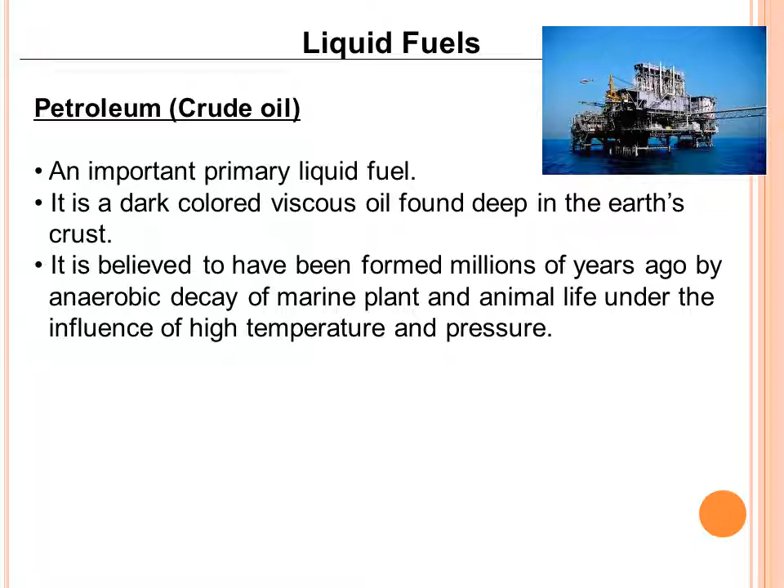So it is a non-renewable source of energy. It is mainly a complex mixture of hydrocarbons, like straight chain paraffins, cycloparaffins, olefins and aromatics. It is a mixture of all these with small amounts of organic compounds containing nitrogen, oxygen, sulfur, and some traces of inorganic compounds.

If we see the elemental analysis of this crude oil, the average percentage of carbon can vary from 83 to 87%, hydrogen 11 to 15%. Because of these two, we get a huge calorific value from this crude oil. Along with carbon and hydrogen, it contains sulfur and oxygen. Sulfur percentage may vary but can be up to 3%. Nitrogen and oxygen can be from 0.1 to 5%.

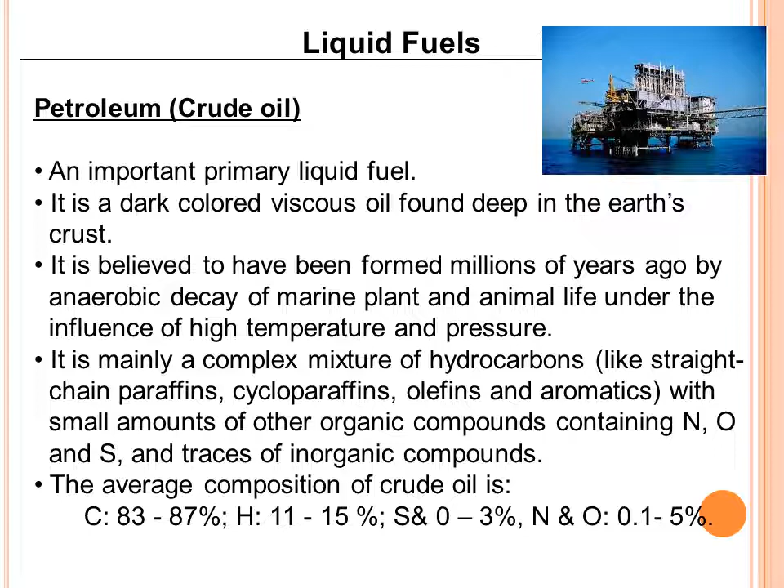Depending on which type of hydrocarbons are present, petroleum is divided into three types. First type is paraffin based, where the major component is paraffin. It contains saturated hydrocarbons from CH4 to C35H72. With that, it may contain a little of naphthalenes and aromatics. From C18H38 onwards, resins and waxes are present.

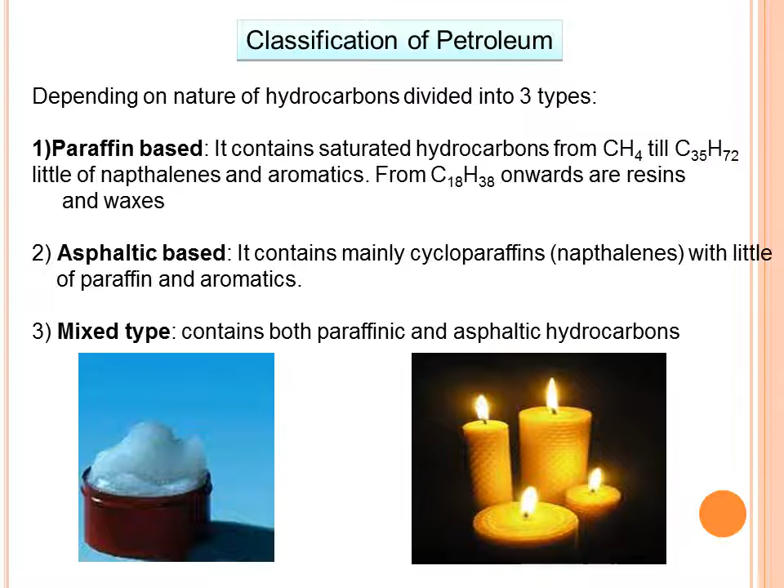Second type is asphaltic based. It contains mainly cycloparaffins, that is naphthalenes, with a little paraffin and aromatic. Third type is mixed, which may contain both paraffin and asphaltic hydrocarbons.

Mining of petroleum: how is it done? Mining of petroleum is done by drilling holes in the earth's crust. Through the holes, pipes are sunk up to oil bearing rocks. Usually, because of the pressure of natural gas, the oil itself comes out. If it will not come out, it is mechanically pumped out using an airlift pump.

Two coaxial pipes are present in the oil bed. Compressed air is forced through the outer pipe, and because of that, oil comes out from the inner pipe. This oil is then conveyed to the refinery through pipelines, where the next process, refining of that petroleum, is done.

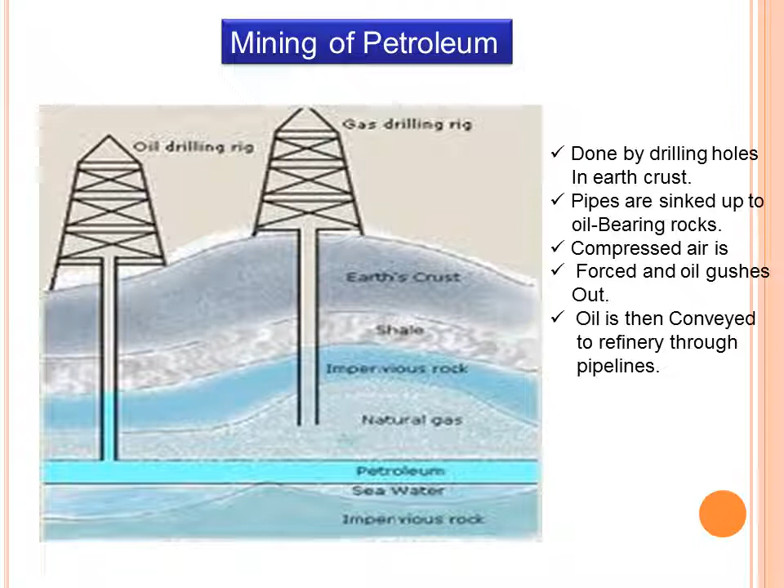After mining of petroleum, the next step is refining of petroleum. Petroleum can't be used as a fuel as it is, since it is a complex mixture of a number of hydrocarbons in the form of solid, liquid or gaseous. So we can't use it directly as a fuel or as a feedstock for chemicals.

So separation of petroleum is done. It is the process of separation of crude oil into different useful fractions on the basis of their boiling points. That is nothing but refining.

Now refining is done in three steps. First is separation of water. Oil with water forms an emulsion, so in the first step we have to remove that water. This emulsion is passed through highly charged electrodes, where the water forms big droplets, and then we can separate it out easily. This process is called Cottrell's process.

Then in the next step, removal of sulfur is done. This oil is treated with copper oxide, forming copper sulfide precipitate, which we can remove by filtration. In the second step we have to remove sulfur, because if we use oil as fuel with sulfur present, it will form harmful gases. So first we have to remove that sulfur. That is the second step.

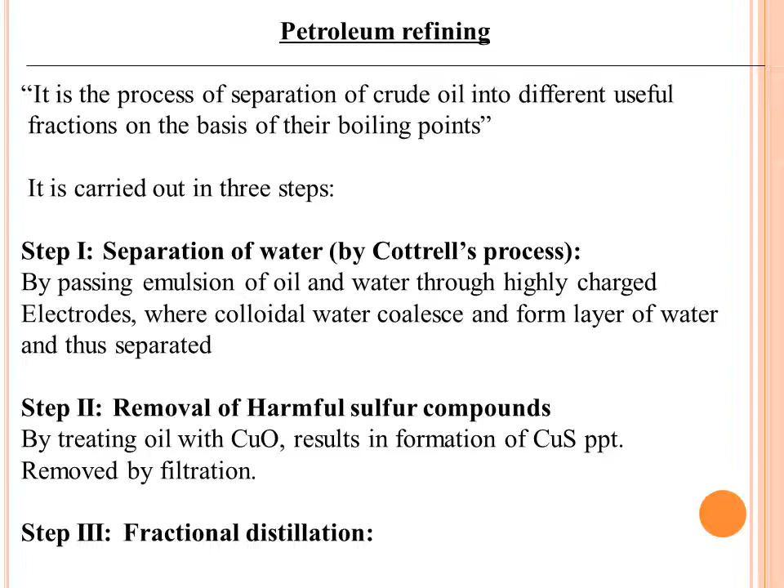The third important step is fractional distillation. What is the principle of fractional distillation? It is that vapors of higher boiling point fractions condense first during stepwise cooling. I will explain this principle, but first we will see the construction of the fractionating tower. It is made of stainless steel, and it is tall and cylindrical.

This tower has a number of small trays made of stainless steel. Each tray or horizontal plate has loosely held bubble cups, through which vapors of the crude oil can pass. Now we will see the process: first the crude oil is heated up to 400 degrees centigrade, and then it is passed through the fractionating tower.

But first, fraction means the constituent. So the first fraction will come out as residue, because its boiling point is more than 400 degrees centigrade. Other than that, all is in the form of vapors, which will pass through the loosely held bubble cups, traveling from bottom to top. So the principle is that the vapors of higher boiling point condense first, and that first fraction comes out.

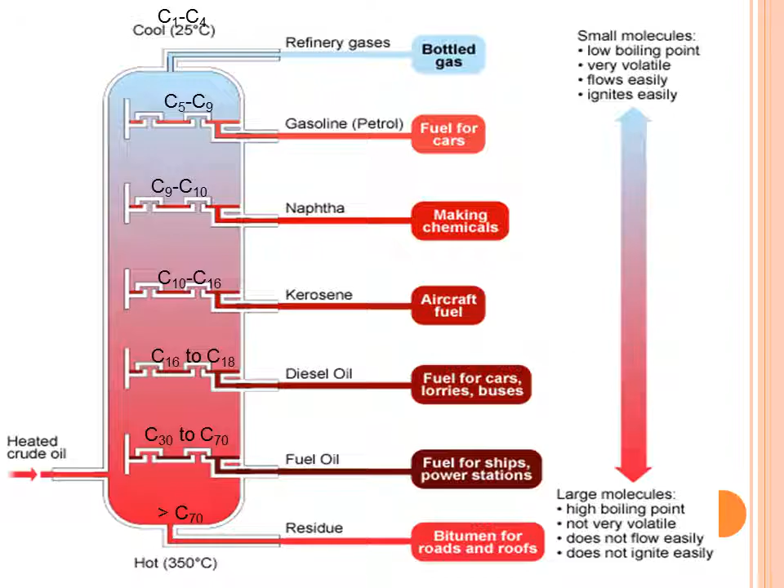So this is fractional distillation. Again, what is the principle? The fraction or constituent having higher boiling point will condense first and come out first. Other fractions will travel through the bubble cups, with step by step cooling, and we collect the constituents step by step. So here again the principle is given: the vapors of higher boiling point fractions condense first during the stepwise cooling.

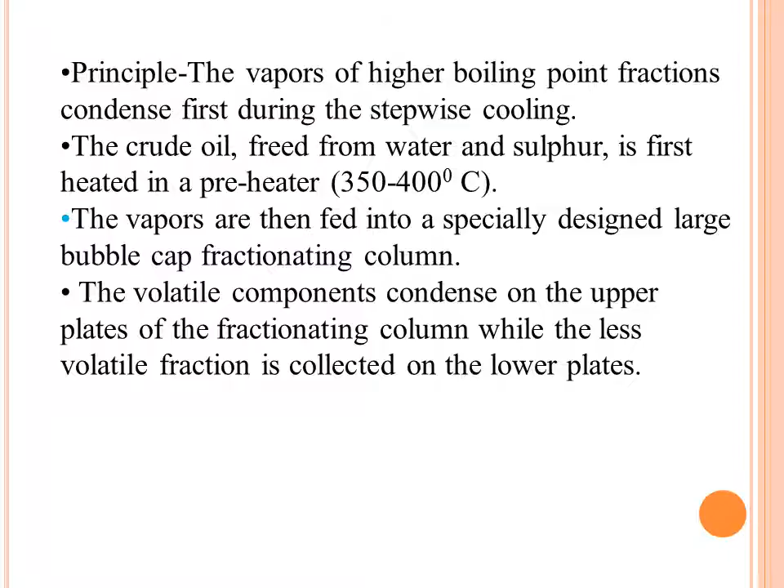The crude oil, freed from water and sulfur, is first heated in a preheater to a temperature up to 400 degrees centigrade. The vapors are then fed into a specially designed large bubble cap fractionating column. The volatile components condense on the upper plates of the fractionating column, while the less volatile fraction is collected on the lower plates. Then there is a table given here with the name of fraction, boiling range, approximate composition, and uses.

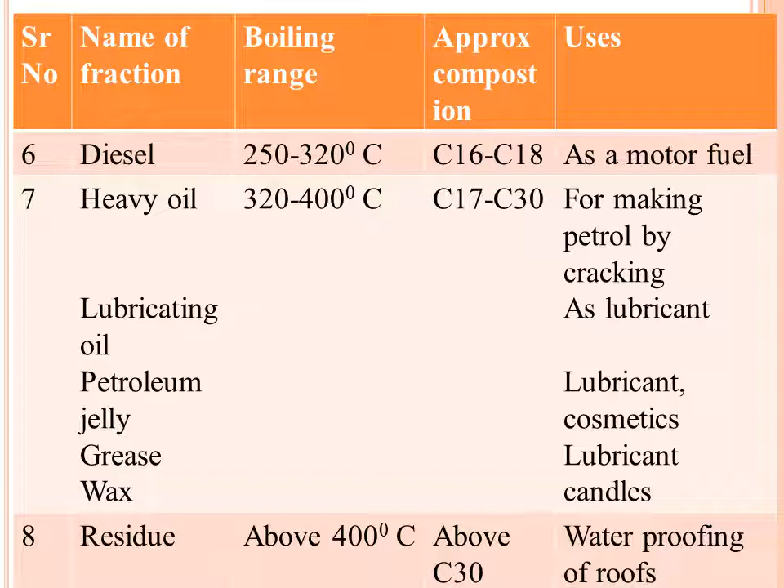Now next we have to see some gaseous fuels. Why are gaseous fuels important? These gaseous fuels have very high calorific value, and they burn clean without smoke or ash. As there is no inorganic matter, there is no formation of ash, and it burns clean without formation of smoke or any harmful gas. Combustion is controllable and this control is very easy. Highly flammable is the only problem, so special care has to be taken.

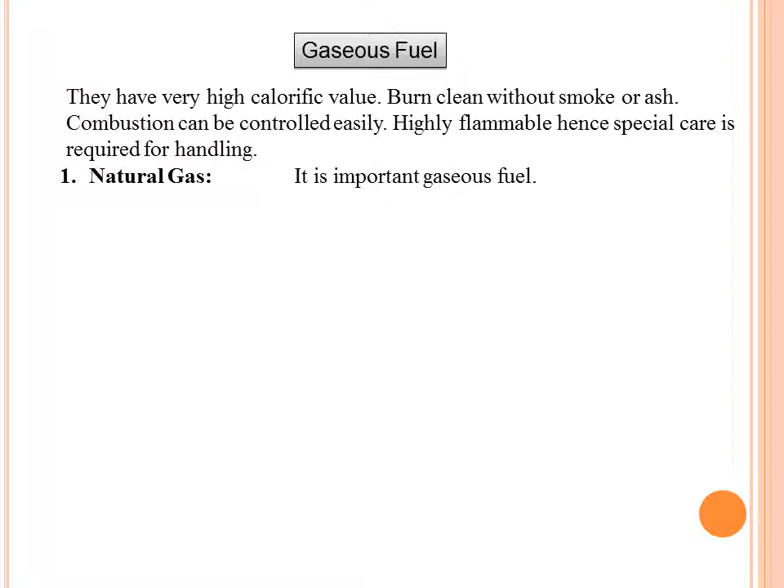First gaseous fuel is natural gas, a very important gaseous fuel. What is the composition of natural gas? Its main constituent is methane, which can be up to 90%, minimum 70%. So 70 to 90% methane is there. Other than that, ethane is there, its percentage can be 5 to 10%. Then propane 3 to 4%, and some butane if it is there. It can also have nitrogen, hydrogen, carbon dioxide, or H2S, and water.

Two types of natural gas are there: dry gas and wet gas. Dry gas means it contains only methane, no other higher hydrocarbons. If only methane is there, that is called dry gas. And if other than methane some higher hydrocarbons are there, then that is called wet gas.

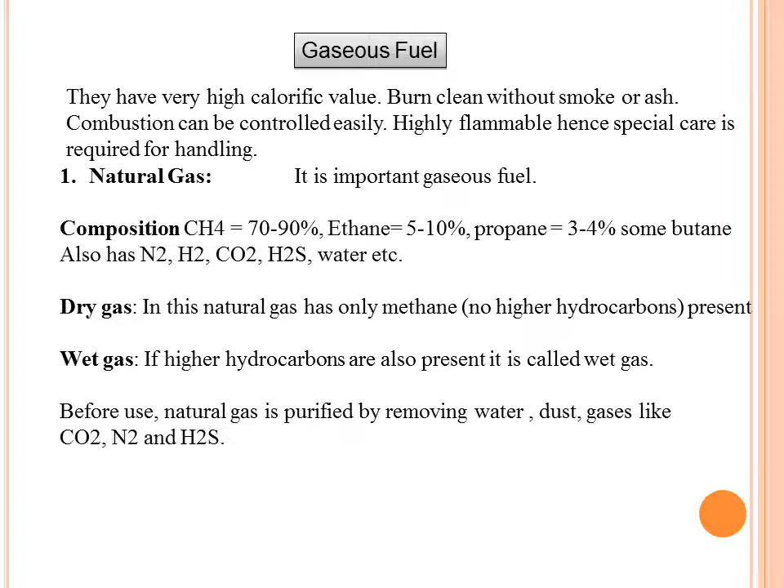Before using natural gas, we have to purify it by removing water, dust, or gases like CO2, N2, H2S. So all that we have to first remove. We have to purify it.

What are the properties of natural gas? Its calorific value is very good, 12,000 to 14,000 kilocalorie per meter cube. It burns clean with a non-smoky flame. Its products will be only CO2 and H2O.

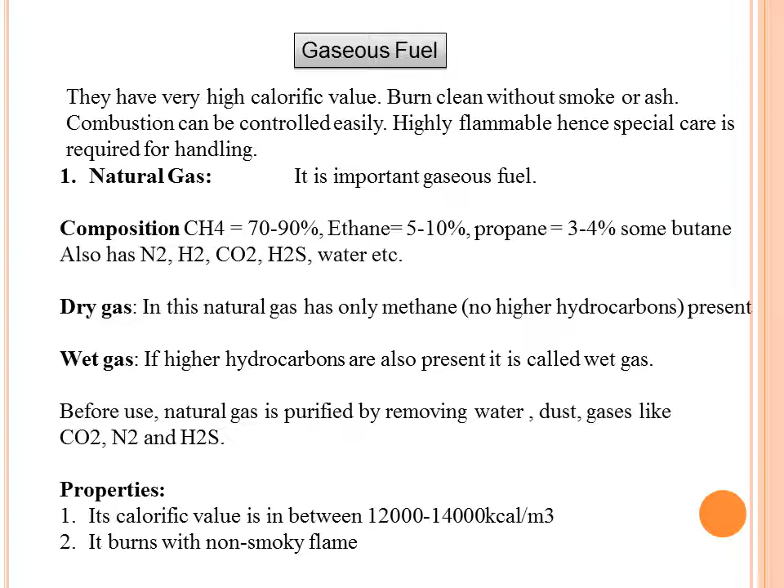Number of applications are there of natural gas. It is an excellent domestic fuel. We can use it as it is as a fuel, or we can compress it and liquefy it and use it as a fuel. It is used in manufacturing number of chemicals like methanol and acetic acid, so it is a very good feedstock for number of chemicals. It is a raw material for carbon black and hydrogen also. Fermentation of methane is done to give proteins. It is used as a source of hydrocarbons for electricity in fuel cells.

We have to see that fuel cell in detail. In the fuel cell, we can use natural gas for production of hydrogen, and then hydrogen and oxygen will give us electricity. Hydrogen as it is, we can't store because of number of difficulties, so one step is added in that fuel cell: methane is converted into hydrogen, and then that hydrogen is used in the fuel cell. We have to see that fuel cell in detail.

Then the last application is major feedstock for ammonia production. Why is ammonia production important? Because it is used in fertilizers. So this ammonia production is a very important application, and for that, natural gas is used.

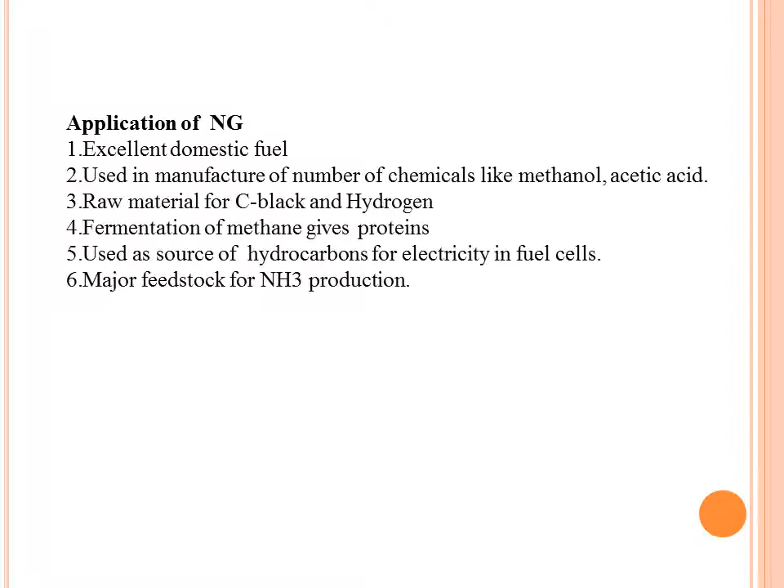Next gaseous fuel is CNG, compressed natural gas. Natural gas is compressed to 1000 atmospheric pressure. Which natural gas do we use? That is dry, meaning no higher hydrocarbons are there; if present, their percentage is too low. Natural gas has no odor, so to detect leakage if any, we have to add some sulfur compound. Natural gas is lighter than air, so it is significantly safe for use.

Composition: the main constituent naturally is methane, its percentage is 70 to 90%. Ethane can be 10 to 20%. Propane can be up to 2 to 8%.

What are the properties of CNG? Whenever there is combustion of CNG, no pollutants like sulfur, nitrogen, or carbon particles will form, because on its combustion there will be formation of only CO2 and H2O, since reactants are only hydrocarbons. So hydrocarbons on complete combustion form CO2 and H2O, with no formation of any harmful gas.

Ignition temperature is higher, that is 550, so more air is required for ignition. If complete combustion occurs, there is formation of CO2, but if incomplete combustion occurs, there is formation of a small amount of carbon monoxide. CNG mixes better with air than liquid fuel. CNG requires heavier and voluminous tanks, so it's not suitable for smaller vehicles, because it requires a voluminous tank as it is lighter than air.

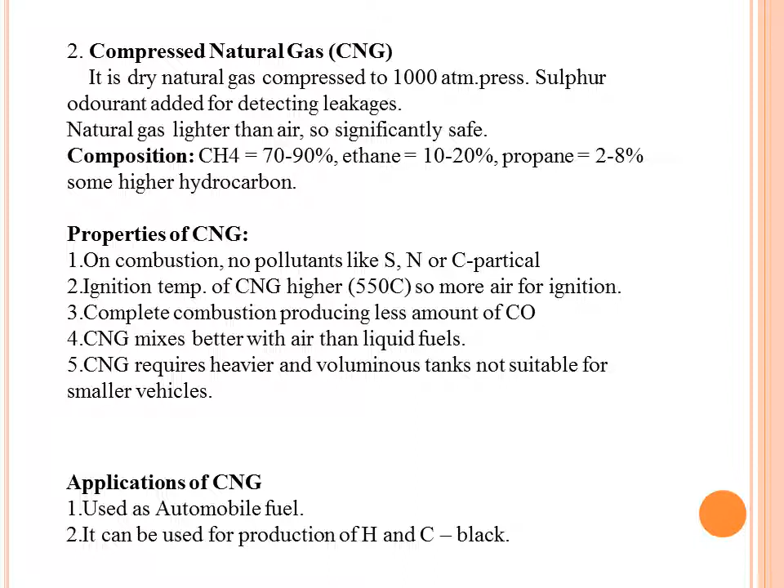Other than CNG and NG, one more very good fuel is hydrogen gas. Hydrogen gas is called the future fuel because it has very good calorific value, and it is a renewable source of energy.

Nowadays whatever fuels we are using, petrol, diesel, are from crude oil. So these fuels are fossil fuels, and at some point they will finish. After that, what fuel can we use? So we are finding a number of non-conventional fuels.

This hydrogen has very good calorific value. There will be complete combustion of hydrogen, and there will be production of only H2O. So this is called the future fuel.

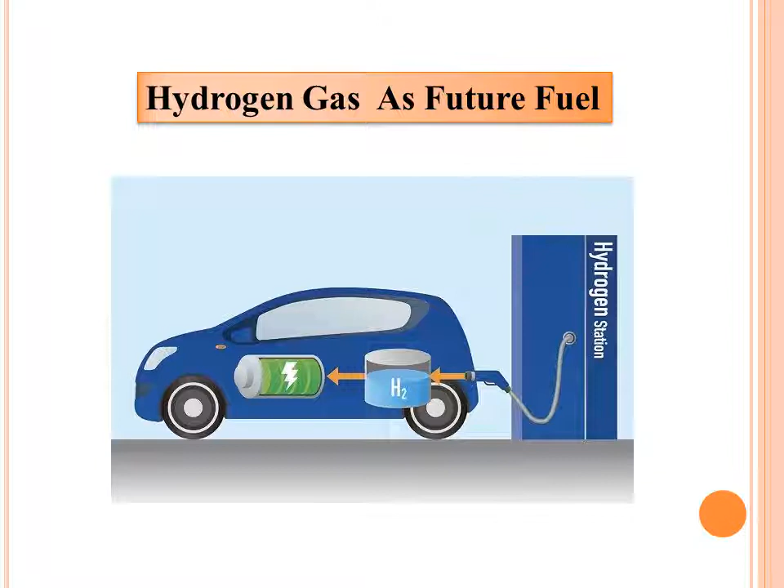Why is it called future fuel, or what makes hydrogen gas a future fuel? Because it is non-toxic and clean burning. Whenever there is complete combustion of H2, there will be formation of only H2O. It also has high calorific value.

We can compare that calorific value with fossil fuel, because for any fuel we want to use, first our demand or need is to compare it with fossil fuel. If it is comparable, then only can we use it as a fuel. It is also the most abundant element on earth. Because of this, we can say hydrogen gas is the future fuel.

But at the same time, a number of difficulties or hurdles are there for hydrogen gas. Which are these difficulties? Its production is expensive and inefficient. Whatever methods we are using for its production, these methods are expensive, and from there we can't get pure hydrogen, or these methods are not that much efficient.

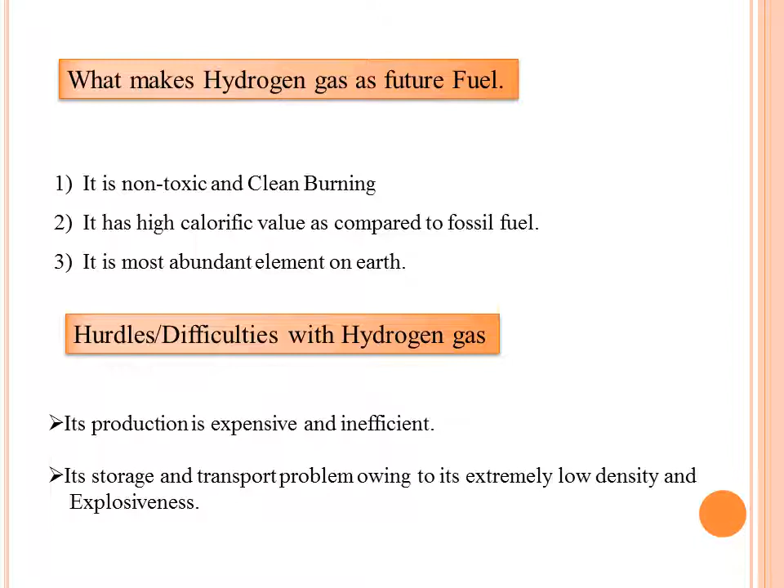Then one more very important difficulty is its storage and transportation. Because of its low density and its explosiveness, storage and transportation are also big hurdles. But even so, we are doing research on that, because at some point we have to use hydrogen as a fuel.

Now we have to see some methods of production of hydrogen. From fossil fuel, water, biomass, we can produce hydrogen. Different methods are there, like steam reforming, thermochemical, partial oxidation, and electrolysis of water. From these methods we can produce hydrogen, but majorly hydrogen is produced by steam reforming.

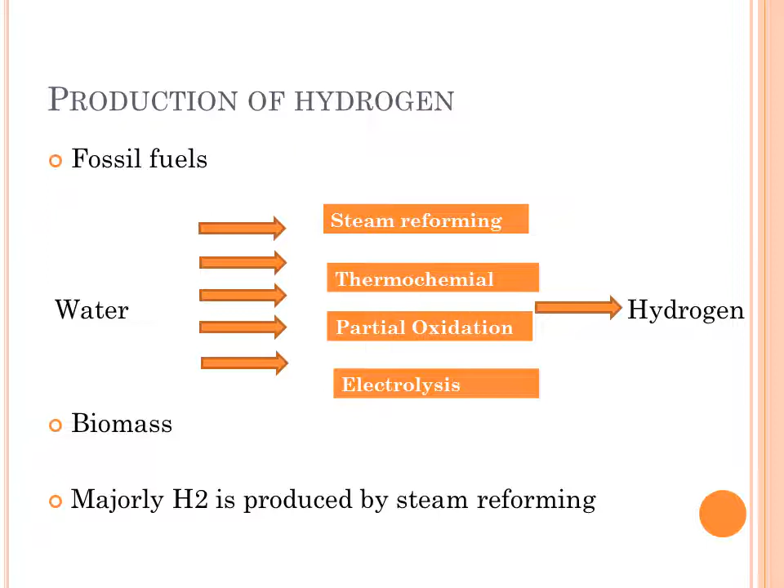So we have to see now steam reformation of hydrogen, the industrial production of hydrogen by steam reforming. Steam reforming of methane, from natural gas, is done. This methane is mixed with steam and passed over a nickel catalyst.

What temperature is used? It is 700 to 1000 degrees centigrade. Because of this reaction, there will be formation of water gas, which is CO plus 3H2. The reaction is CH4 plus H2O, with nickel catalyst, giving us water gas, CO plus 3H2.

Separation of H2 here is somewhat difficult, and to get more amount of hydrogen, the next step is done, which is the water gas shift reaction.

So that gas from the steam reformer is mixed with more steam, and it is cooled to 400 degrees centigrade. In steam reforming of methane, temperature can be up to 1000, but here it is cooled to 400 degrees centigrade and passed through a shift converter.

Which catalyst do we use here? Iron copper catalyst is used here. In the first reaction, nickel is used as a catalyst; in the second, iron copper is used. In the first, temperature is 700 to 1000; in the second, it is cooled down to 400.

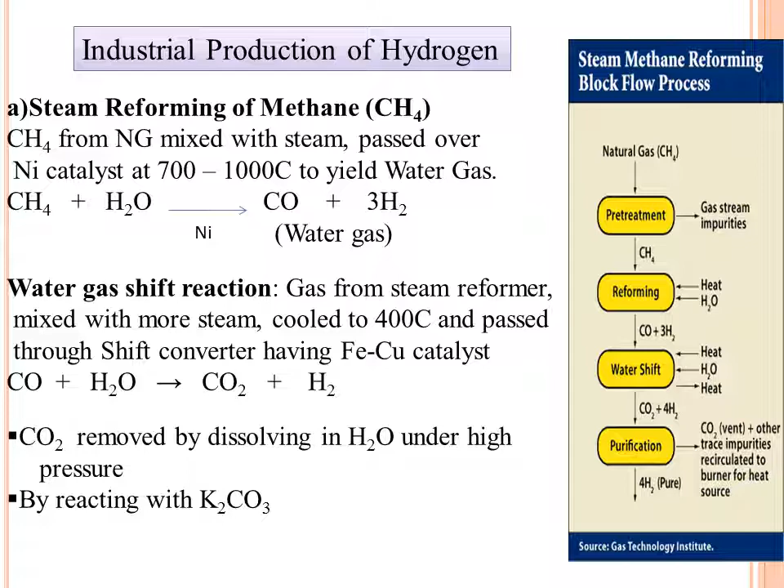Same steam reforming of coke is also done. Only thing is, in steam reforming of methane the feedstock is methane, and here in place of methane it is coke. Coke is obtained by heating coal at high temperature. From that coal, other than carbon, moisture and volatile matter are removed, and whatever we get is nothing but coke. This method is steam reforming of coke, and this is a cheap method.

Here which catalyst do we use? Same, it is nickel. Temperature is also 1000 degrees centigrade. Coke and steam are reacted, and we get the same water gas, CO plus H2.

To get more hydrogen, a second reaction is also done, that is the water gas shift reaction. The gaseous mixture is mixed with steam, and then cooled to 400 degrees centigrade. Here the catalyst used is Fe2O3 in that shift converter. Then there is formation of CO2 plus H2.

We can use one method to separate CO2 from H2. CO2 is removed by dissolving it in water under high pressure, or we can react it with K2CO3. Using any one method, separation of H2 from CO2 is done, and that H2 can be stored somewhere and then used.

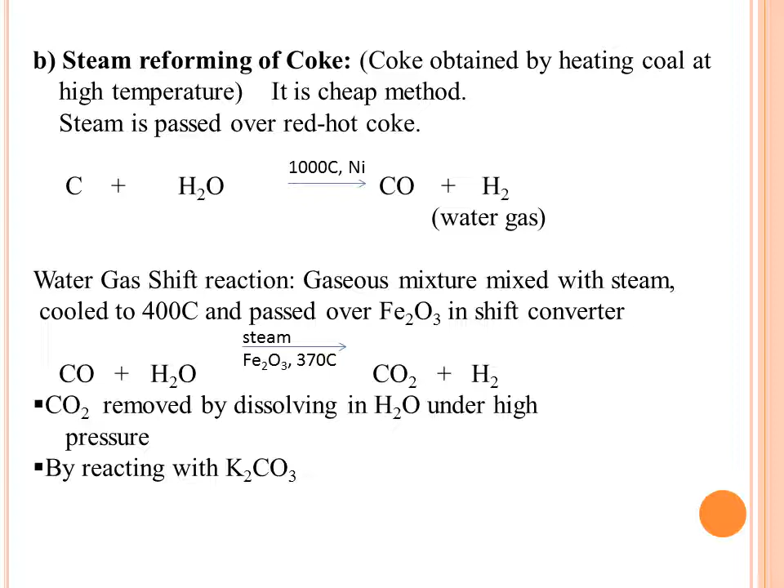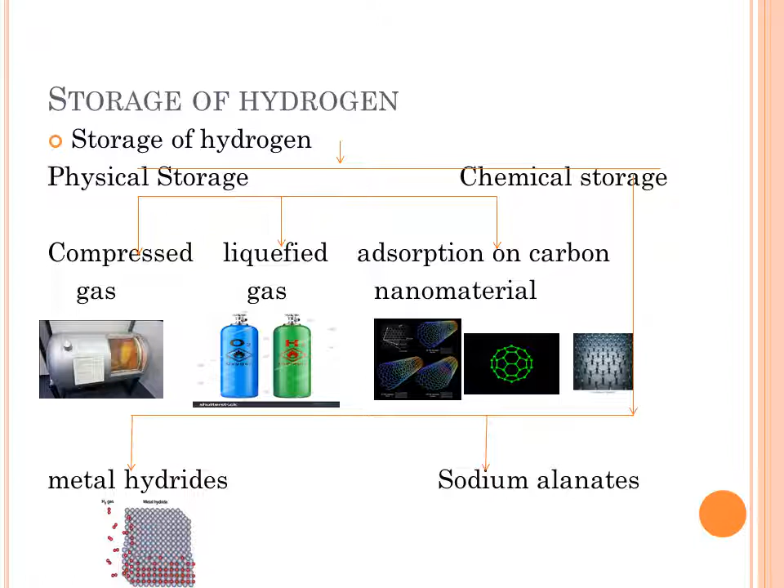Again, storage and transport of hydrogen is given here. For using hydrogen as fuel, its storage is very important. The first method we can use is physical storage. In that, the first one is compression—hydrogen is compressed and we can fill it in small tanks. But here, compression requires more energy, which adds to its cost.

The second method is liquefaction, where we have to maintain cryogenic temperature, so this is also not a very useful method—it is expensive. The next one is adsorption on porous carbon nanomaterials—any nanomaterial like fullerene, graphene, or carbon nanotubes can be used. But still calculation and research need to be done to find which method can be the ideal one.

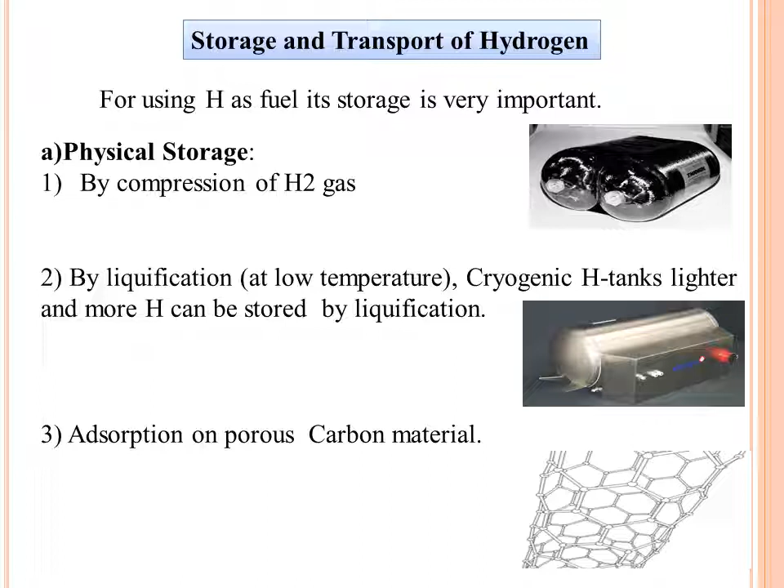This one is a unique, novel method for storage of any fuel. For other fuels we don't use this, but here hydrogen is stored in the form of metal hydride. This method is safe and efficient. The metal or alloy reacts with hydrogen, forming metal hydride. Then, on board at low temperature and pressure, it is heated, and it releases hydrogen, which we can use as fuel. Also, like metal hydride, hydrogen can be stored in the form of sodium alanates.

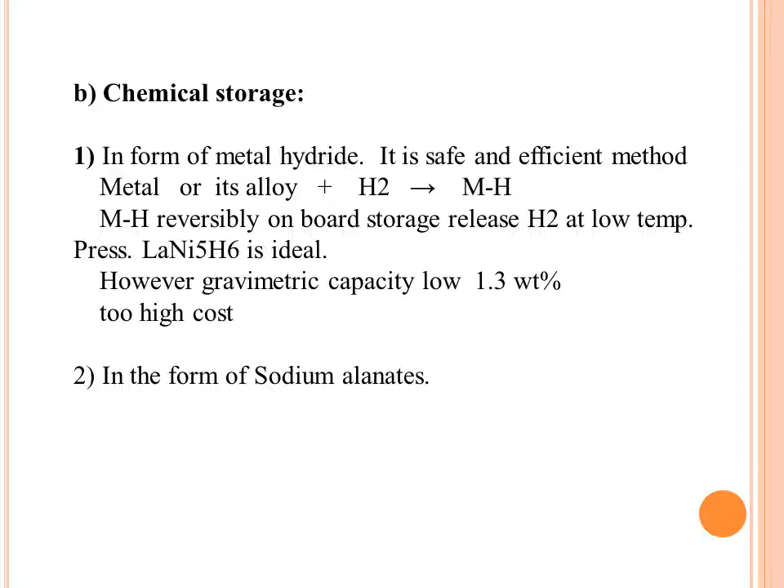So here, what are the difficulties in storage and transportation of hydrogen? First, with compressed hydrogen, high pressure tanks are required, which will reduce the fuel economy. Energy is consumed for compression of that hydrogen, and decarburisation will occur in the steel cylinders.

If we liquefy it, liquid hydrogen is more efficient than gaseous hydrogen, but energy has to be spent in cooling and liquefying it. We also have to maintain that minus temperature, and good insulation should be there, otherwise there will be boil off, which increases weight, volume and cost of the tank. So no method is yet ideal for storage and transportation of hydrogen.

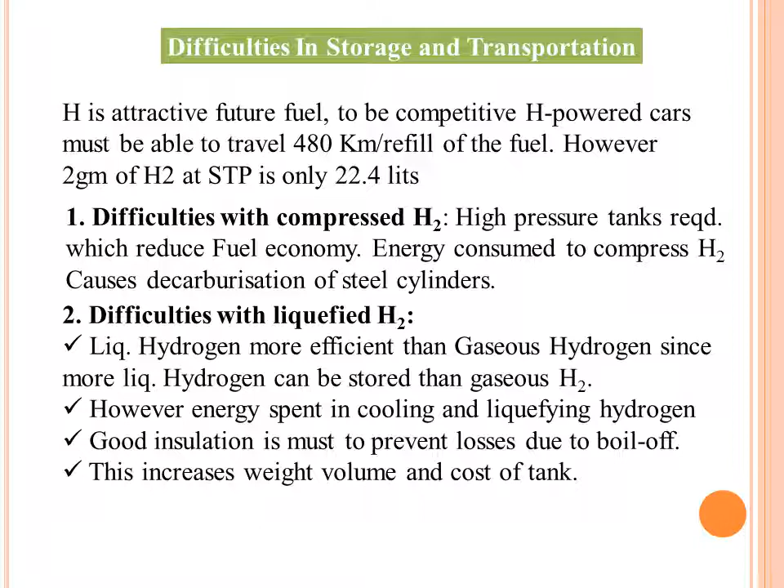We still have to do research so we can find an ideal method to use hydrogen as a future fuel. Though there are difficulties in storage, transportation and production of hydrogen, it is still a future fuel, because it has number of applications, and because of that we have to do research to find good methods for its production, storage and transportation.

There are number of applications: we can use it as a fuel to replace fossil fuels. For production of ammonia, hydrogen is the natural feedstock. For metal refining and extraction, we have to use hydrogen. There are number of other uses too, like for electricity generation, which is also a very good use of hydrogen. Because of that, number of research we have to do.

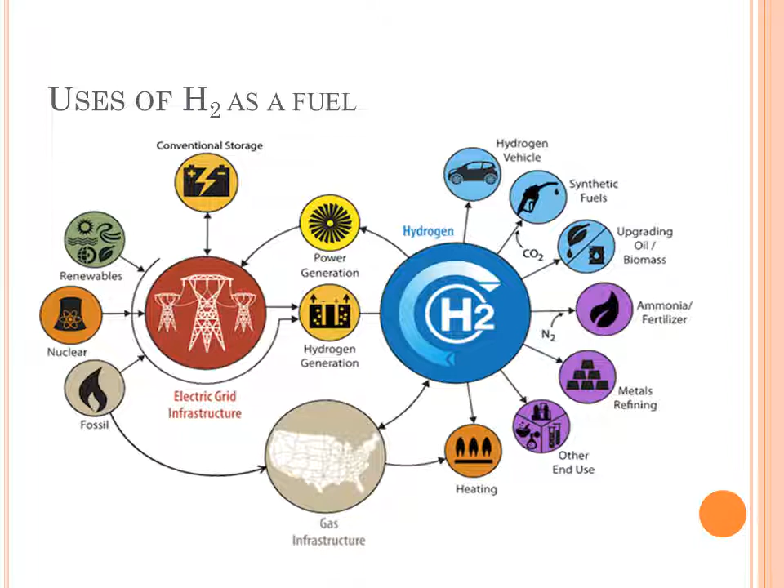So number of applications are there, but as a fuel, what are the applications of H2? H2 can be used as a rocket fuel because of its good calorific value. It can also be used as a fuel in an IC engine or in a fuel cell. Hydrogen in an IC engine is similar to that of a petrol engine, where hydrogen reacts with oxygen to produce hot gases which move the engine parts. This is one application.

What is the second application? A fuel cell is a device that uses hydrogen and oxygen to generate electricity by an electrochemical reaction. Why is it called a cell? Because there is an electrochemical reaction, there is formation of a cell, that is an electrochemical cell. Two electrodes are there, and these two electrodes are separated by an electrolyte.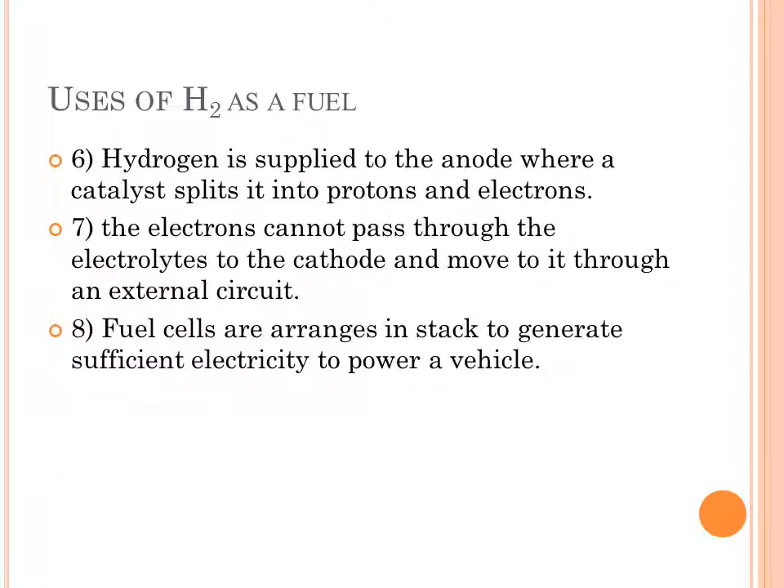Depending on which type of hydrocarbons are there, petroleum is divided into three types. The first type is paraffin based, where the major component is paraffin, containing saturated hydrocarbons from CH4 to C35H72, along with a little naphthenes and aromatics.

There are two compartments: in one compartment we fill H2, and in the other, oxygen is filled. The fuel cell has two electrodes, cathode and anode, and these two electrodes are separated by an electrolyte, which is phosphoric acid. Now hydrogen is at the anode where there is a catalyst, and because of that, this hydrogen splits up into protons and electrons.

These protons and electrons try to pass through the electrolyte, phosphoric acid. But this electrolyte will allow passage of only protons, not electrons. So electrons travel through the external circuit and produce electricity. Then these protons pass through the electrolyte and react with oxygen and with the electron to produce water.

So this is the fuel cell. Again, two compartments are there: first we fill hydrogen, in the second oxygen is there, and these two are separated by an electrolyte that allows passage of only protons, not electrons. So hydrogen, because of the catalyst, splits into protons and electrons. Protons pass through the electrolyte, but electrons pass through the external circuit, producing electricity, and then the protons with O2 and electrons form water.